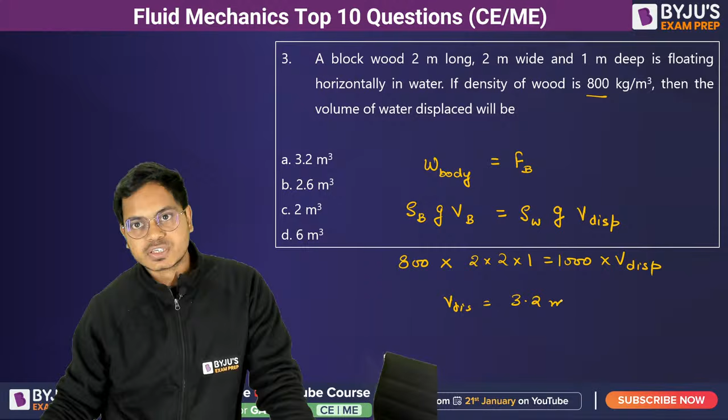Volume of the body would be how much? 2 into 1 equals to density of the water is 1000 into displaced volume. From here, the displaced volume will come out to be 3.2 meter cube. Very well. Next question.

Air flows at 9 meter per second past a smooth rectangular plate 0.5 meter wide and 5.5 meter long. The turbulence level in the oncoming stream is low and transition occurs at Reynolds number 5 into 10 raised to the power 5. The kinematic viscosity and density of air are 0.15 Stokes and 1.24 kg per meter cube. Now, the total drag force when the flow is parallel to the width is how much Newton? Answer please.

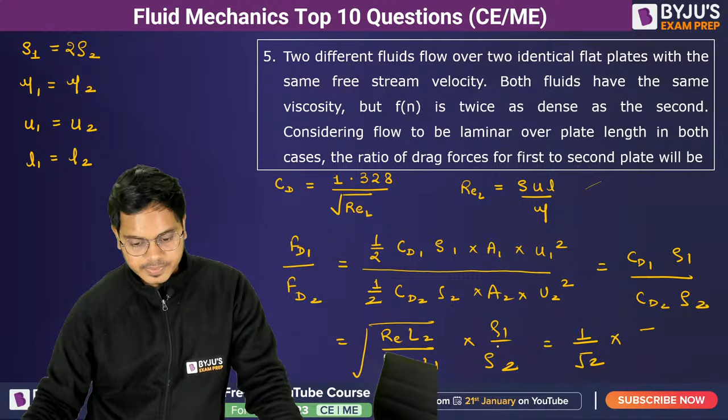Rho 1 by rho 2. And from here, this value is how much? 1 by root 2 into, this will be how much? Rho 1 by rho 2 is nothing but 2 only, right? 2 only. So eventually, from here you get the answer as root 2.

How many of you got this? Pavan got this answer. Very good, very well. Sahi hai bhai.

Midway, sixth question. See what they are saying. Simple question, very simple. Do not make the mistake. Read the question properly and you will get the answer. Yes, Hemang, 1.414 also you can say.

A pipeline connecting two reservoirs has its diameter reduced by 20% due to deposition of chemicals. For a given head difference in the reservoir with unaltered friction factor, this would cause reduction in discharge of how much percentage? Please answer. Let's say the dia of, what they are saying, two reservoirs. Okay, before and after case.

Initially, let's say dia was D, and after that, 20% deposition happened, so dia must have reduced to 0.8 D. Two cases we have got. Now we know, as per Darcy-Weisbach equation, head loss in terms of discharge is fLQ² by 12.1 D⁵. From here you can make the relationship between discharge and the diameter of your pipe.

You can clearly see that D⁵ is proportional to Q². Or in simple terms, (D2/D1)⁵ equals (Q2/Q1)². You know D2 is 0.8 D and this is D, power 5, equals (Q2/Q1)². From here you will get a relationship between Q1 and Q2: Q2 will come out to be 0.57 Q1.

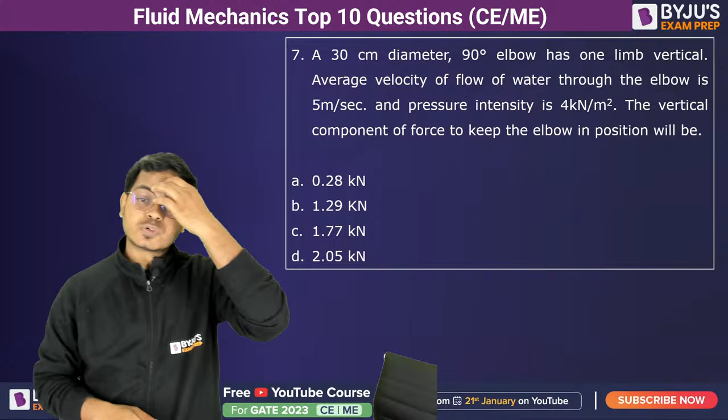Another question, a beautiful question. A 30 centimeter dia, 90-degree elbow has one limb vertical. Average velocity of flow of water through the elbow is 5 meter per second and pressure intensity is 4 kilonewton per meter square. The vertical component of force to keep the elbow in position will be how much? Tell me.

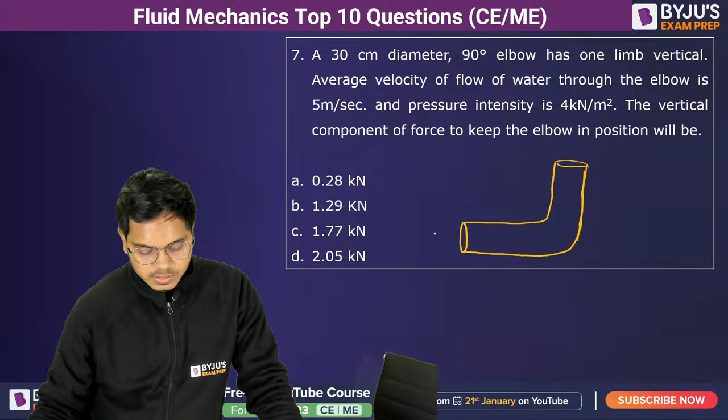It's a 90-degree elbow. It should look something like this, right? Let's say this is the force Fy which we are interested in. Now let's put the equation here. The net force equals change in momentum. That's what we are going to use. Come on.

Only vertical force we need to consider. So Fy minus pressure into area equals rho Q times v, the final velocity, minus 0, since initially there is no vertical velocity component. So directly you can say Fy equals rho Qv plus pA. Get the values, everybody? How much it is?

Pressure intensity is 4 kilonewton per meter square, right? So 4 into area, pi by 4 d square, 0.3 square. Not converting into Newton, I am not converting this into Newton. Plus here in kilonewton also. So rho Q, 1000 into, how to get this? Velocity you have, rho Av.

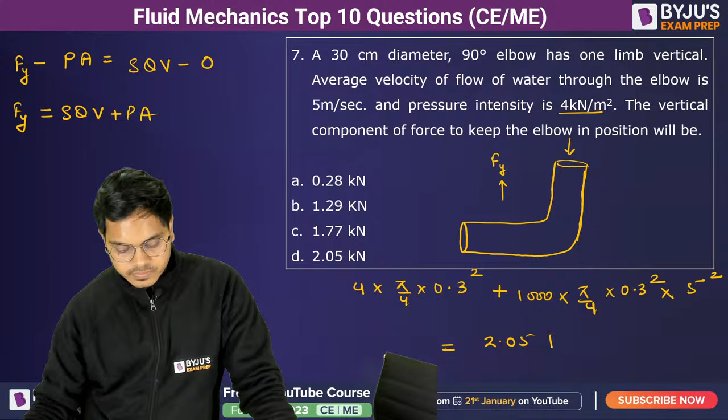Pi by 4, 0.3 square, into velocity square, that is 5. So from here it should be 2.05 kilonewton, which is option D. Okay, next question.

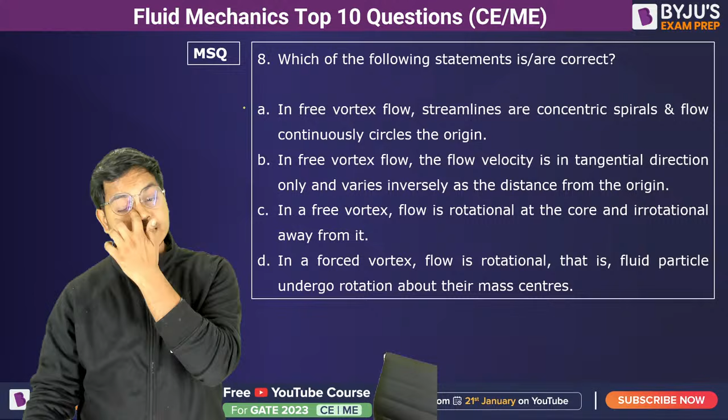In a free vortex flow, streamlines are concentric spirals and flow continuously circles the origin. That's correct. Okay. In free vortex flow, velocity is in tangential direction only. No. In a free vortex, flow is rotational at the core and irrotational away from it. Free vortex, obviously, yes or no?

Because there is no external torque applied here. In forced, flow is rotational. Yes, undergo rotation about their mass center. That's correct. So option A, option C, option D are correct for this MSQ question. Got it, everybody? Very well.

Next question. A cylindrical tank of depth 2.5 meter and dia 1 meter has a hole of dia 2 centimeter at the side near the bottom. It is observed that when tank is full, jet of flow drops 45 centimeter after traveling 2 meter. What is the coefficient of velocity if coefficient of contraction is given as 0.68? Please, answer dijiye.

Basically you need coefficient of velocity, right? So please answer. Coefficient of velocity, if you are not aware of it, it is nothing but actual velocity by theoretical velocity. Scenario is something like this. There is a tank. Okay, and they are saying the tank has the depth of 2.5 meter. Dia is 1 meter. Has a hole of dia 2 centimeter somewhere here near the bottom.

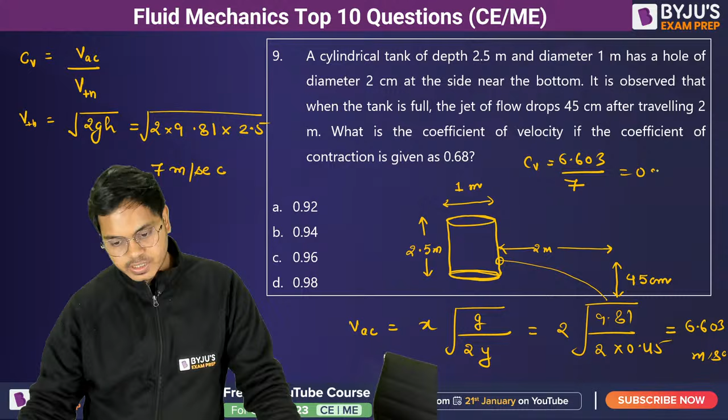Actual velocity is x under root g by 2y. X is 2 meter, g is 9.81, 2 into y is 0.45. The velocity would be 6.603 meter per second. Now from here you can get the coefficient of velocity. That would be 6.603 by 7, and that is 0.9433. So the right answer would be option B. I think this is the first question that no one was able to answer. Good and bad, both altogether.

Last question, a pipe of diameter 200 mm. Now I am expecting everybody to answer this question. A pipe of diameter 200 mm carries water in turbulent flow. The velocity of water at center of pipe and 50 mm from center of the pipe are 3 meter per second and 2 meter per second respectively. What is the shear stress at wall of the pipe?

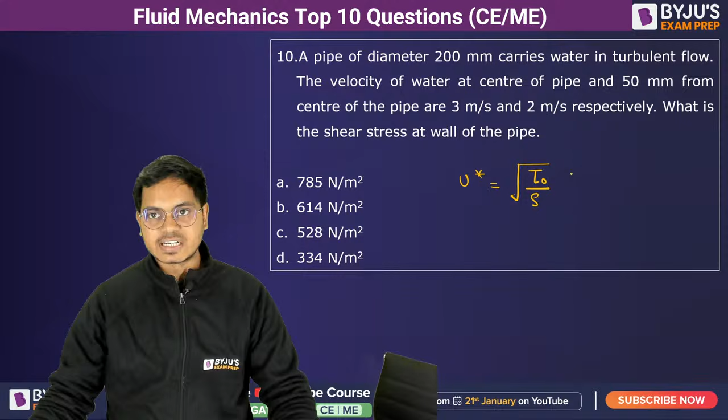If you remember, you can find this with the help of shear velocity. Shear velocity is under root shear stress at wall by density. Somehow if you can get the shear velocity, you can get the value of shear stress at wall. This relation you can use to find out the value of U star. Here, sorry.

So put the values: 3 minus 2 equals U star into 5.75 log base 10. Y will be how much? Capital R minus small r. Capital R would be how much? It would be 100 mm. 100 minus how much? Or you can say 0.1 minus 0.05. So Y value would be 0.05 meter. So put the value 0.05 divided by radius, which will be 0.1 only. Put the values and get the answer.

Kitna? 3333. Okay. How much is the value of U star from here? I think it should be 0.578. Is it? So let's put the value. So 0.578 is equal to under root tau naught by rho. So tau naught should be equal to 334.08 Newton per meter square, which is option D.